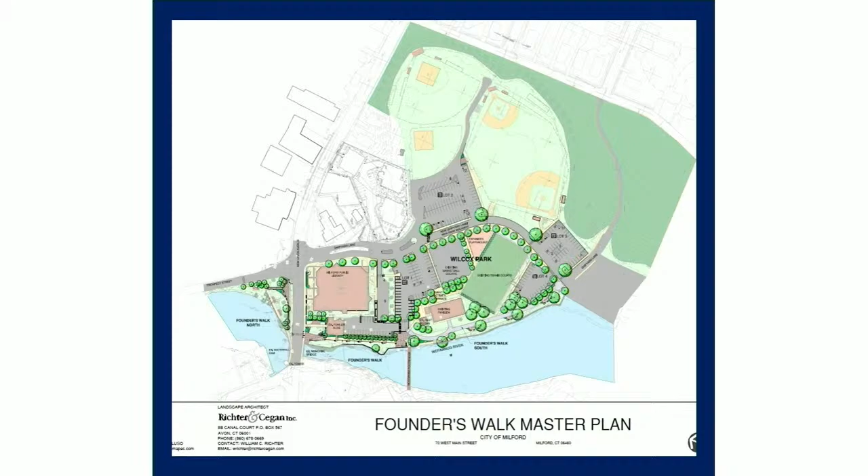And this is the picture of the project as it was voted on by the Board of Aldermen in 2022. It was a concept drawing. This project has always been about safety. According to the 2012 Plan of Conservation and Development, the design of the area is haphazard, confusing, and potentially unsafe.

From 2020 to 2025, I reached out to the police department to see if they had any accident statistics. There were only 4 reported accidents in that time, but there are a number of near misses that wouldn't be reported. In fact, we're going to go through some of the emails I've received from librarians, but the librarians say they receive regular safety complaints.

Chris Angeli, the former Milford librarian, participated in all of the Founders Walk Committee meetings up to her retirement, and we are keeping Scott apprised as well of developments in the project.

From some of the meetings or emails they've received, if people take the ramp coming across Hotchkiss Bridge, they have to walk in the road in order to join back with Founders Walk or to go to the library. Someone using a walker or chair has to go all the way past where the digital sign is just to get back onto the sidewalk.

This puts them in the path of cars, making a nearly 90-degree turn to drive towards the water, and creates a dangerous blind spot. The red arrow shows where if you were handicapped, you would have to go down and get into the road in order to go back towards the library, and there's no sidewalk or safe passage from there back to the library.

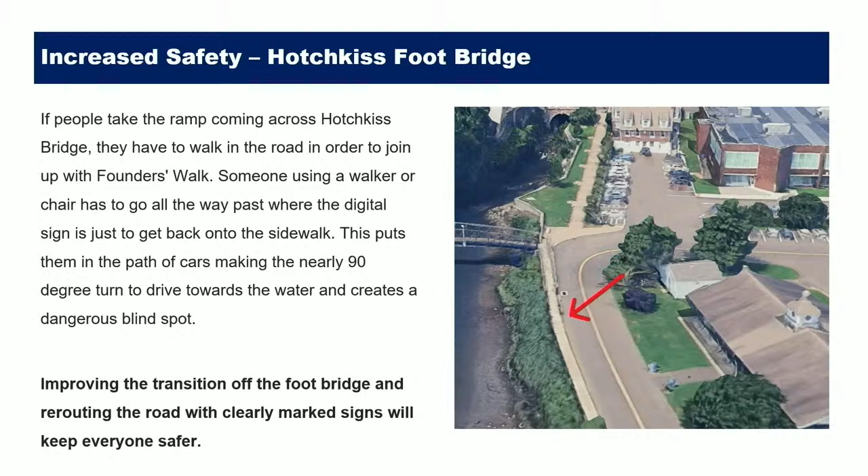So improving the transition off of the footbridge, rerouting the road will be clearly marked, and the signs will help keep everyone safer. This is actually a confusing area.

After I read this email, I myself was driving through there and realized when you're coming out of where the baseball fields are, you aren't necessarily sure who has the right of way, and that you're joining into an active road.

One of the more dangerous sections is where the road goes between the traffic island and the main parking area. There have been multiple close calls with people backing out of parking spaces into the road while cars are coming at them from two directions, down the hill and around the corner from the marina.

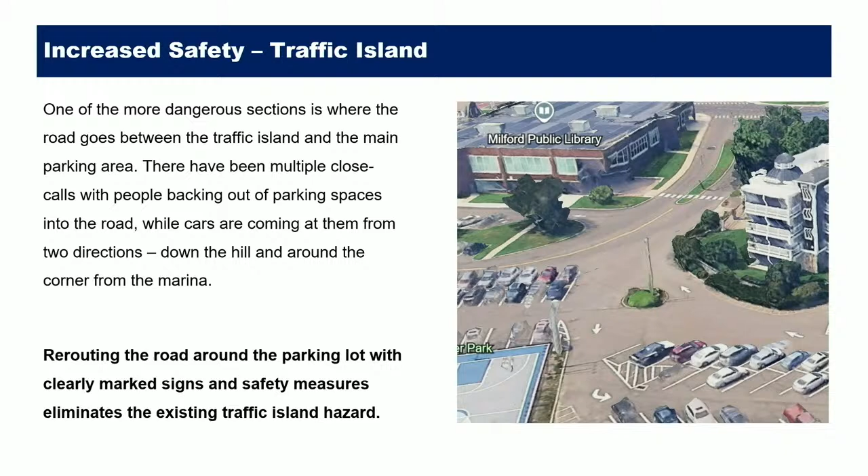So rerouting the road around the parking lot with clearly marked signs and safety measures eliminates that existing traffic island hazard. The road through the parking lot is an actual street, making it more active and dangerous, and you can see those cars back right onto the street.

There's no space between the active street and the back of those parked cars. There's not currently adequate space for cars to pull in and out of parking spaces without interfering with the road. Cars much larger than the sedan stick out into the road when parked, and cars on the road have to swerve to avoid them. So again, adequately sizing the parking lot and rerouting the road will help improve the safety of the area.

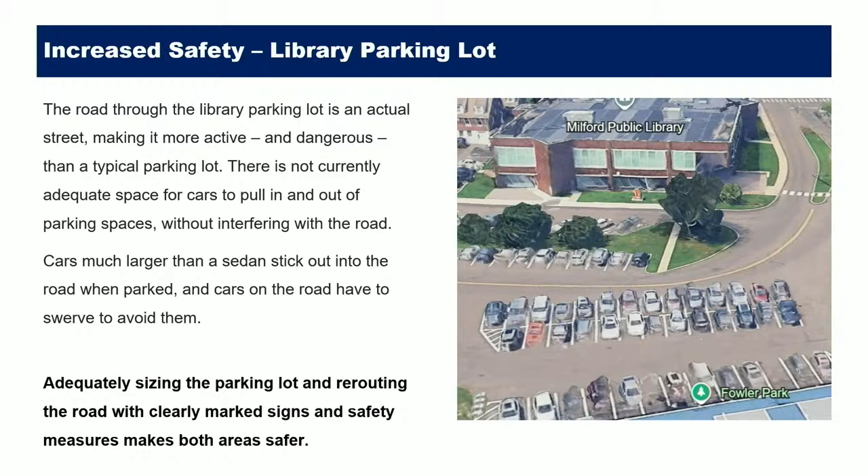Additional safety improvements include 1,700 linear feet of new sidewalks and crosswalks in the project. Actually, that number is incorrect - in the full project there are 7 crosswalks, not 6.

Currently, the sidewalk around the pavilion needs to be repaired - that will be repaired. We're also updating the traffic flow, adding a new book drop by the library, so you'll be able to drop off books from a car without having to stop and take up a parking spot. That will hopefully improve the safety.

There will be a new fire hydrant closer to the boat ramp, 240 parking spaces, and a number of traffic calming measures that we'll go over, including narrowing the road, adding smarter traffic islands. Just last night, we received approval from the Traffic Commission to add in something different.

It's not recommended to do speed bumps in the area because of the boats on trailers - it would not be good.

But Don, our project engineer, has really solved a lot of these problems. He saw in Oxford where they used a cobblestone road, which effectively serves as almost like a rumble strip. It makes noise, so it improves the safety, but it also keeps in character of the downtown.

So we're going to add 40 feet of cobblestone road in there where the road is narrowed, which will help slow the traffic even further as they go through there.

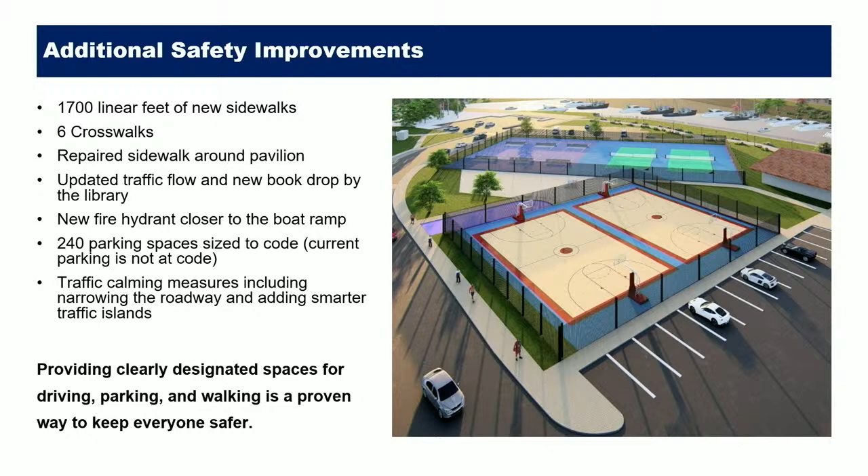Drainage improvements: the current drainage system is not adequate to manage stormwater. In fact, the reason why the project is costing so much is a lot of the drainage improvements that we realized after designing it that we'll need to do.

Significant flooding occurs regularly, making the playground and surrounding areas unsafe and unusable. So we're making significant improvements to drainage in the area.

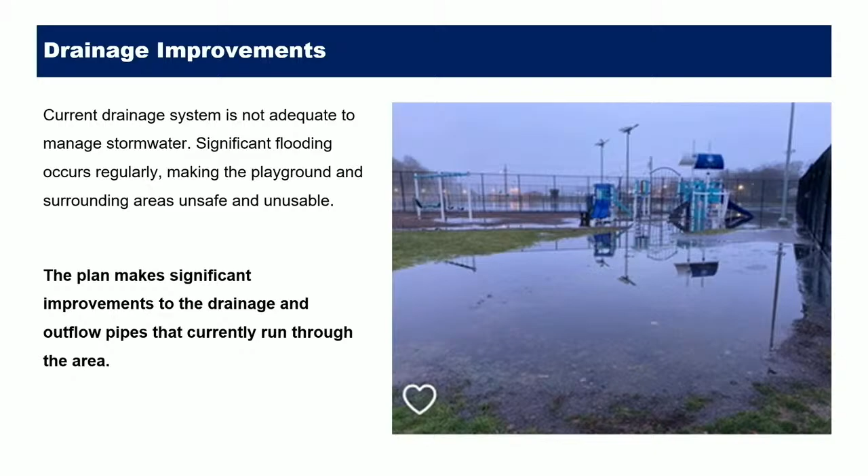And these are other pictures of after a rainstorm, of all of the flooding we see down in the area.

So the phase 2 improvements include the relocation and updating of portions of Shipyard Lane. It's not really straightening the road out as much as changing the curve. Whereas now you go this way, you'll be curving the other way, and it adds a stop sign by the boat launch ramp, so you'll have to stop and take a 90-degree turn left to exit the area.

Reconfiguration of the existing parking lots, most significantly by the Little League fields, where you have 2 different lots on different levels where the parking spaces aren't up to code. That will create just 1 parking lot with all of the spaces up to code.

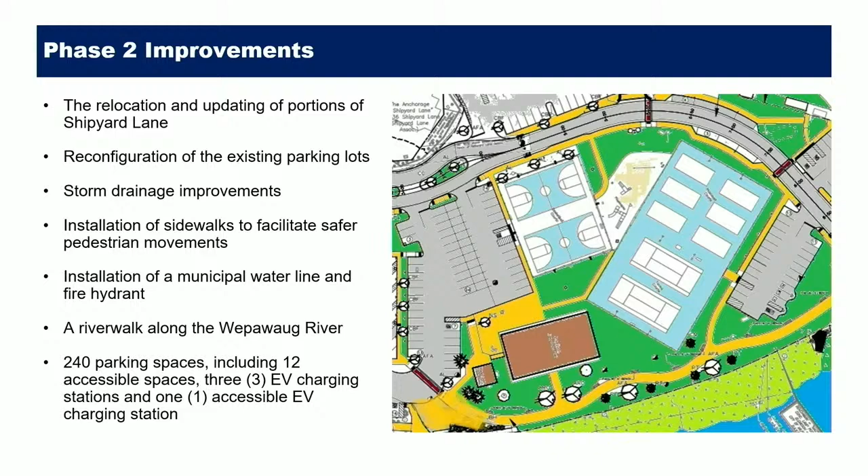Storm drainage improvements, installation of sidewalks to facilitate safer pedestrian movements, installation of a municipal water line and fire hydrant, a river walk along the Wepawaug River, 240 parking spaces including 12 accessible spaces and 3 EV charging stations, actually 4 total since one will be an accessible EV charging station.

The approvals received include the traffic authority — we went back last night for additional traffic authority — the fire marshal, and the Office of the State Traffic Authority. The letter I include here is from the Office of the State Traffic Authority stating that they don't think the improvements will change the amount of traffic in and out of the road.

The reason we had to go to them is that if there was any change, we would have had to redesign the intersection at New Haven Avenue. They did approve it without requiring those changes because it was their feeling that it won't significantly change, or change at all, the amount of traffic going down behind there.

The funding of the project right now is to be 100% state funded. We have $3.65 million total to date from the state. We do anticipate potentially more, but this amount funds what we've been discussing.

The breakdown: $355,000 for design and construction administration, $2.8 million for the construction contract, another $71,000 for parking lot overlay, and $362,000 contingency. So we didn't budget up to the full amount, but again we do anticipate potentially securing more funding if necessary.

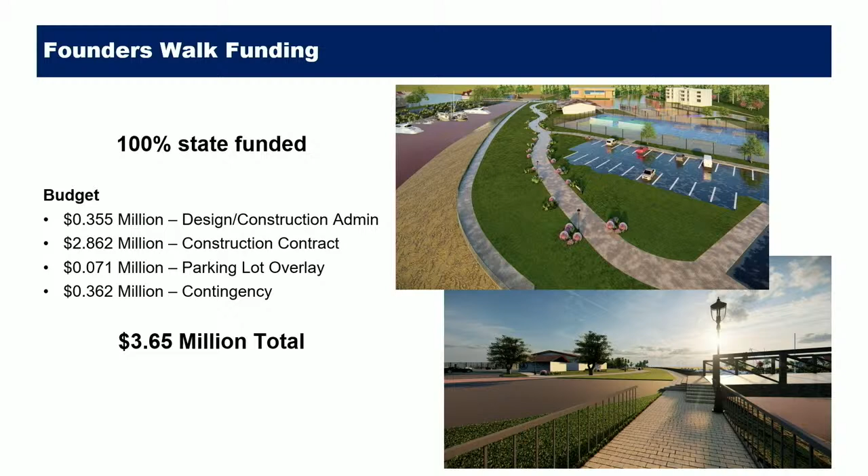Since the original design of the project, we are looking at increasing the height of the fence for more protection from foul balls from the road. We have another drawing later on showing where that will increase. We're going to fence in the area around the Milford Junior Major League field so that if families are in there, the children will be in a fenced-in area, since there was concern they may wander towards the road.

Based on a suggestion from Alder Ellen Beatty when we presented to the Board of Aldermen, she asked about bollards to protect against a car coming off the road for more protection. So we'll show you in the drawing, we are going to incorporate bollards as well, giving a safety feature to prevent cars from getting into that area while children are fenced in watching the Junior Major League game. We're also going to add additional signage to the crosswalks.

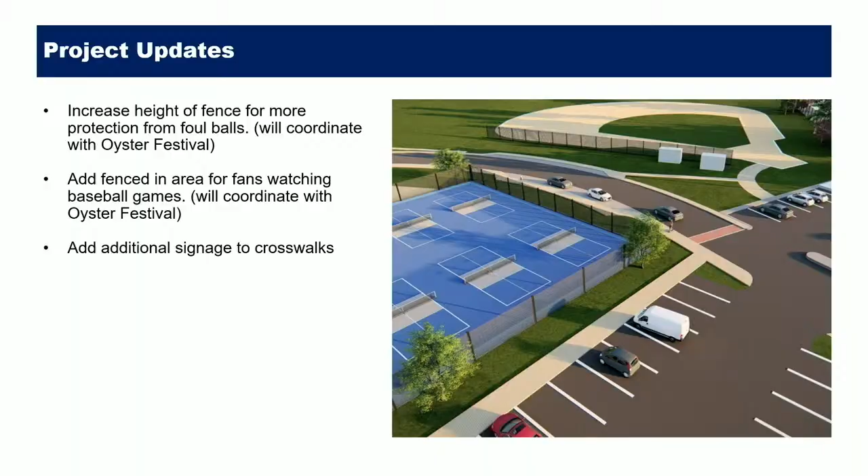So these were just some renderings. I know it's hard to envision how a project will look just from the design, so I tried to colorize some of it. These were renderings I had done using my own money to help make it easier for you to see.

We aren't going to have whatever weird vegetation that is — I asked the person who did the rendering to take it out a number of times, but you can only fight with someone so much. You will have the walkway with the lawn along the water, which will make the pavilion go out to the water. So when you're doing concerts and events there, right now if you're with children, that's an active road going right by the pavilion; now it'll be open out to the water.

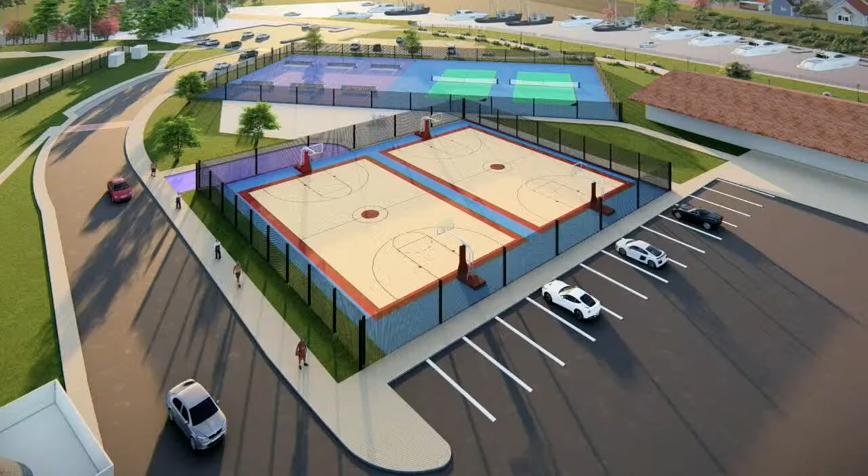We don't have benches shown here, but we're going to add a number of spots for benches. Once you get to the bottom of Founder's Walk, it'll be that walkway all along the river, all along the harbor. This is just an aerial showing how the road curves at the other space, and there will be marked crosswalks like we see throughout downtown.

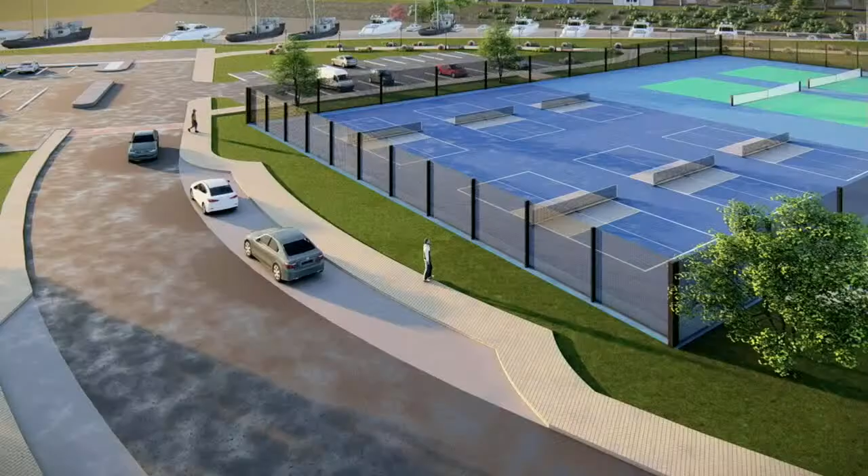So it's just some more renderings to give you an idea of how it will look.

And these are the drawings. I don't know, Don, if you want to talk to what we're here for tonight. Sure, one second. Are there any questions for Senator Maroney before we move on?

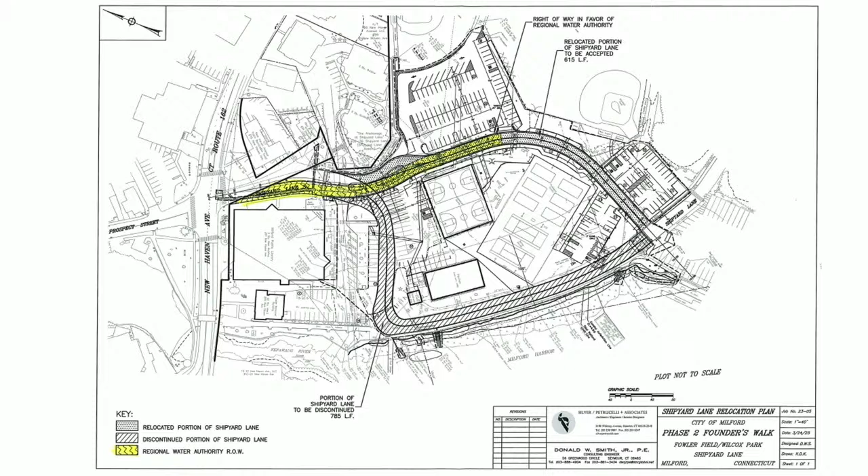I have a question. Why were you not provided most of this in advance? I emailed this presentation to the city clerk's office, or rather the city attorney's office, last week. I'm not sure why you weren't given it. They asked for it to be included and I sent it, so.

To answer your question, I didn't even know there was going to be a presentation like this. This is an 8-24 approval. And 8-24 approvals are just the board approving a lease agreement, a grant being accepted, things of that nature. That's what's going on. You have no say in the project itself, which is being shown this evening. So this is unusual for an 8-24 presentation.

So to clarify, if the planning board were to vote against this, the alders would have to have a supermajority to pass it. Otherwise, it's just a majority of each board to move forward on an 8-24.

That's all well and good, but I read statute 8-24. My understanding is that our responsibility under the statute requires our board to make a report on these proposals to the Board of Aldermen. Am I correct in surmising that our yes or no vote will function as that report for the purpose of the statute?

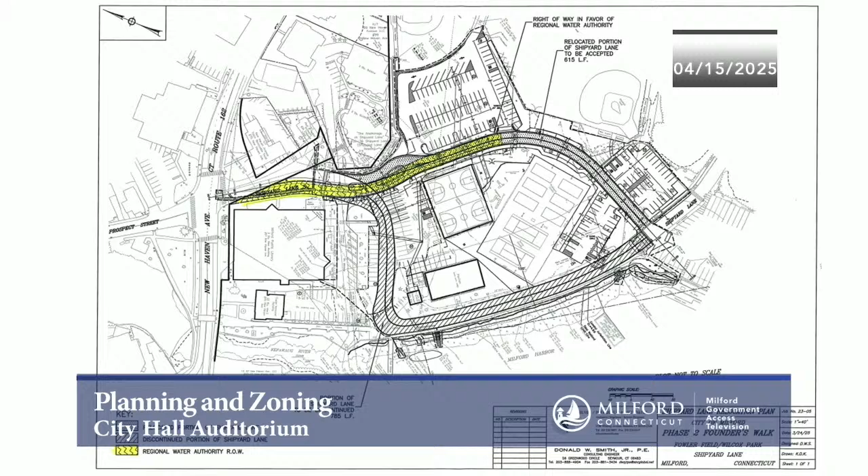The last outfall is right next to the bridge, takes the library area as well as flow from the pond, and that outfall is going to remain, but the city engineer asked that we remove some of the accumulated sediment around that outfall. It's about halfway up on the invert, so at low tide, we'll remove all of that sediment from that outfall and open that up, and then put a backflow preventer in there as well.

So you mentioned the baseball fields. I've heard complaints about the fields.

Is this going to improve the drainage in the fields as well? We're not touching the drainage in the field, but we're picking it up right at the edge of the field going to the outlet. So we're upsizing the outlet, which should make the fields better. Right, thank you.

Any further questions? Good evening. Wondering if you can address the existing width of the roadway and contrast that with what's being proposed, because what's being proposed has different widths along the proposed Shipyard Lane. Thank you. So the existing Shipyard Lane, where it is along the river, I believe is about a 26-foot wide roadway.

The proposed section of Shipyard Lane, where it's a single road, there's a portion where it's split coming in and coming out, but the majority where it's a single road is 24-foot wide curb to curb. Then there's a 40-foot long section before we get to the corner, before the crosswalk, where those curb lines come in from 24 feet. It necks down to 22 feet for a 40-foot long section. The intention of that, and the intention of the 24-foot wide road, is to make it feel more tight.

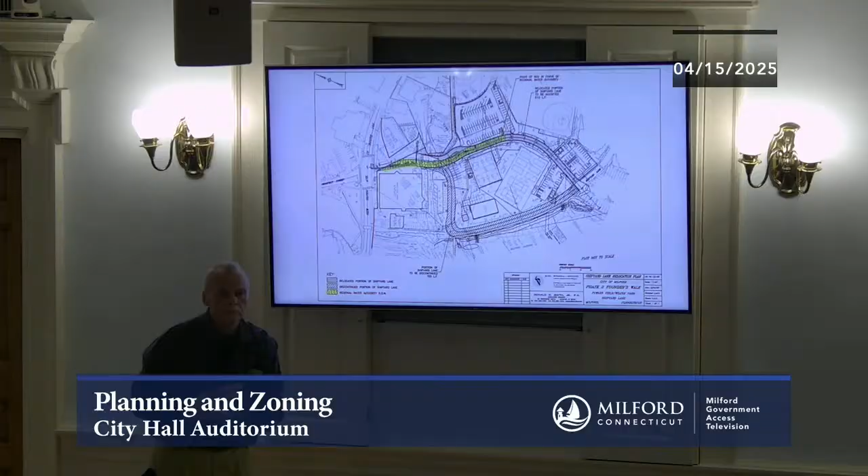Good evening. What is the proposed speed limit in this area? Pardon us? The proposed speed limit in this area? 20 miles an hour. That's the municipal standard for this classification of road.

We asked about dropping the speed limit, and we were told no, it couldn't be lowered. Who said it couldn't be lowered? Traffic Authority, Sergeant Craniac.

And on that narrow portion, the two narrower portions, what would the traffic look like if there was a vehicle with a boat trailer going north-south one way and the other way passing? What'll that do to, say, a 30-foot boat on the back of an SUV, one going one way and one going the other way? They should not go out of their lanes. There will be enough room for them to stay in their lane. There's not a tight enough radius here on the center line, so they're going to go right around the corner and stay in their lane. Thank you.

Any further questions, Mark? Hi. I've been to a lot of the public hearings and even before the public hearings with the aldermen, to some of the planning meetings. A lot of the concern, obviously, is speed limits don't slow people down, unfortunately. People are concerned with the speed coming straight from New Haven Avenue, actually picking up speed coming through that area. I don't think a lot of people were against the actual project, but they just wanted some maybe countermeasures or even other options to slow the speed down.

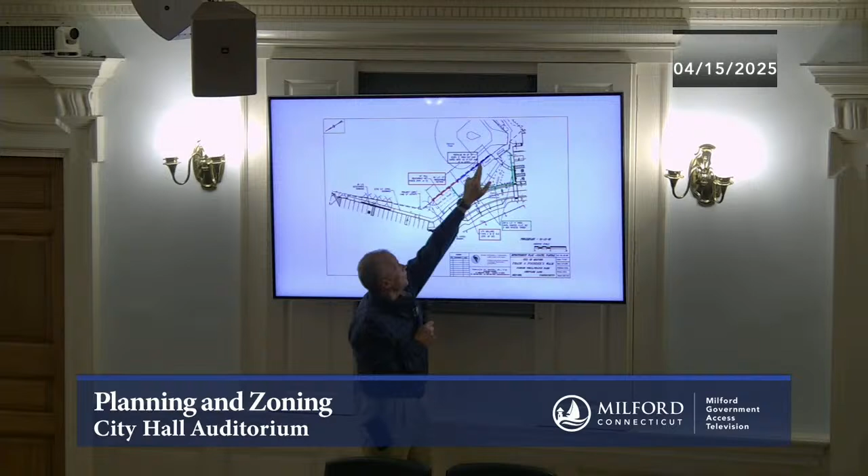I think you're talking about this grass area between the road. Correct. Okay, here's the ball field, here's the corner of the road, here's the first crosswalk. Our proposal is to increase the height of the fence once you get past the dugout. Right now the 15-foot tall fence stops at the beginning of the dugout, so we're going to raise the fence from the dugout to the back of the shed to 15 feet high with chain link. We're also looking at a removable section of netting about 60 feet long, going toward the existing gates onto the field—removable because of the Oysterfest stage location. This green represents a 4-foot high chain link fence around that grass area, and these pink dots represent a line of bollards behind that fence to protect against any vehicles coming.

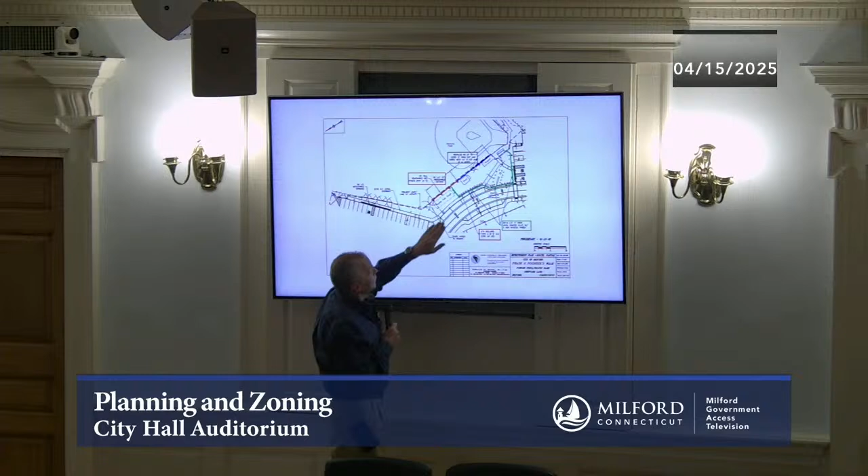The net is proposed, but that still needs to be worked out between the Junior Major League and the Oyster Festival to determine what makes sense in that area, so it's not final.

Any further questions at this point?

Seeing none, I'd hear a motion. I would make a motion that we open this for public comment in a public hearing. We have a motion, do we have a second? I'll second. We have a motion and a second. Any discussion on the motion?

Mr. Chair, this is not a matter for public comment. That time is past. We're not here to discuss the merits of this proposal. That's been done in another legislative body. That's, again, your opinion, and so I guess you'll be voting against the motion. But we do have a motion, we do have a second. We'll discuss it, and then we'll have a vote.

So if there's no further discussion. I would just point out that this board has been highly receptive to public comment in the past, including opening up a coastal site plan to public comment. I think if we were to not do this, after having done something like that, it would be fairly inconsistent with how this board has historically operated.

No, I understand, and that's why it's open for discussion, and then we'll have a vote. And then each member will weigh it in their own way. Any further discussion on the motion?

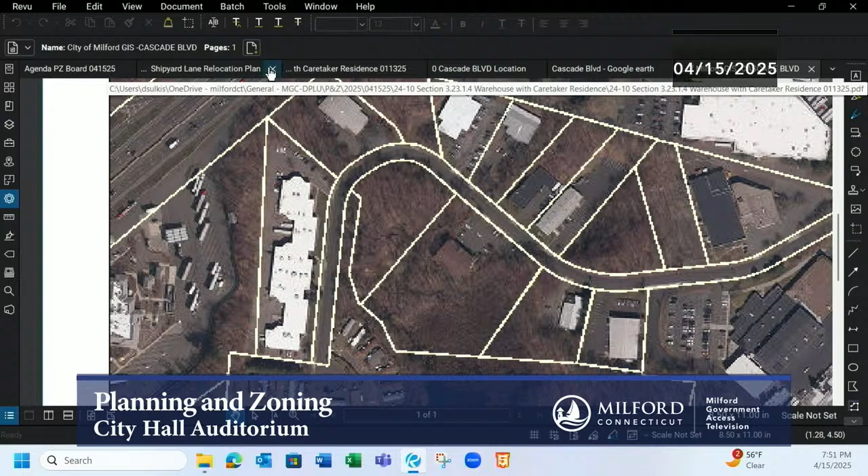Located on that site was the Ryder Trailer Park. Back in, I think it was 1993, Ceruzzi Properties bought that property, and part of the deal was that he was going to buy another parcel of land in Milford to relocate the Ryder Trailer Park to another site.

This property to the south of the subject property, basically the rest of the land in the CBDD zone, is shown on the graphic David has on the screen now. Our property is at the top, right at the curve where Cascade Boulevard comes down off of Marsh Hill Road and Oxford Road. It curves right at our site and then continues into Ryder Woods, which is the parcel where the mobile home park was relocated, that large area just to the south of our site.

So the Cascade Boulevard Design District was designed to move the Ryder Trailer Park there. It has a provision that the site has to be at least 10 acres in size, and there are really only two uses noted as special uses — there are no outright permitted uses in the zone. The special uses currently are single-family detached dwellings, a boarding house, or dwellings placed on 3,000 square foot parcels, which was designed specifically to address the relocation of the mobile homes.

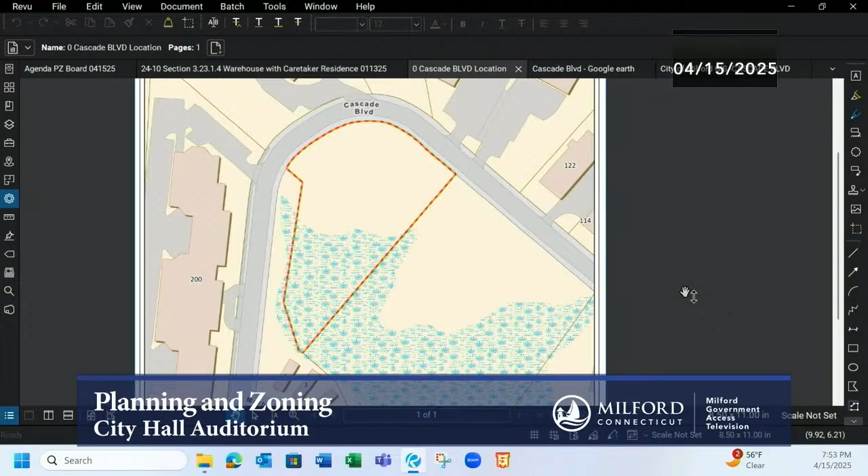The application before you tonight is to add a third special use that will allow a 7,500 square foot gross area warehouse facility.

The proposal, if this regulation change is granted, we'll be coming back to you next month with an application for a special permit, and Ron Wasmer will go through the elements of the site plan. The proposal is to have a 7,000 square foot warehouse facility with a caretaker residence. My client wanted to keep the residential component, which this zone currently allows for, so it's a hybrid. It will have a residence on it and the warehouse facility.

I submit to you that, with the close proximity to the industrial area across the street, the entire stretch of Cascade is industrial. This would be a permitted use in an industrial zone. I'd ask that you allow the regulation to be amended so that we can add this one additional use, and I stress that it's specific to Mark's proposal that we'll be coming to you with.

Other than that, the plans have been submitted. David has the full site plan that we submitted with the application for the special permit already. The plans were reviewed by the city engineer already, and we appeared before the Inland Wetlands Agency, who issued an approval on this project. So this is the last step in the whole process.

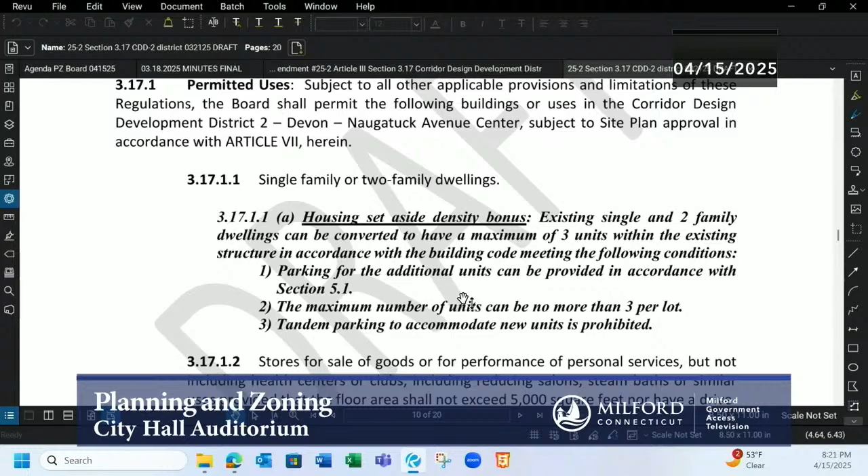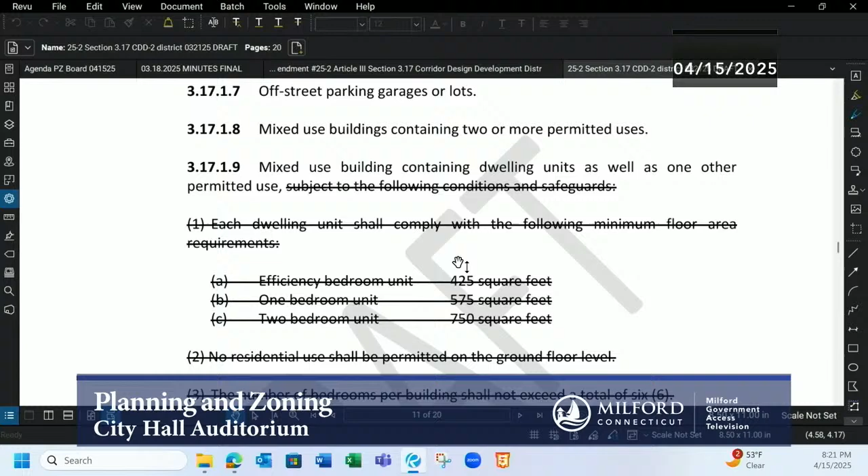The next change was under 3.17.1.9, striking out some existing language. I can read you this. It's the language that was struck, or do you want just the new language? I think we understand that. Okay, so the new language, 3.17.1.10, mixed use and/or multifamily residential buildings, meeting the following conditions.

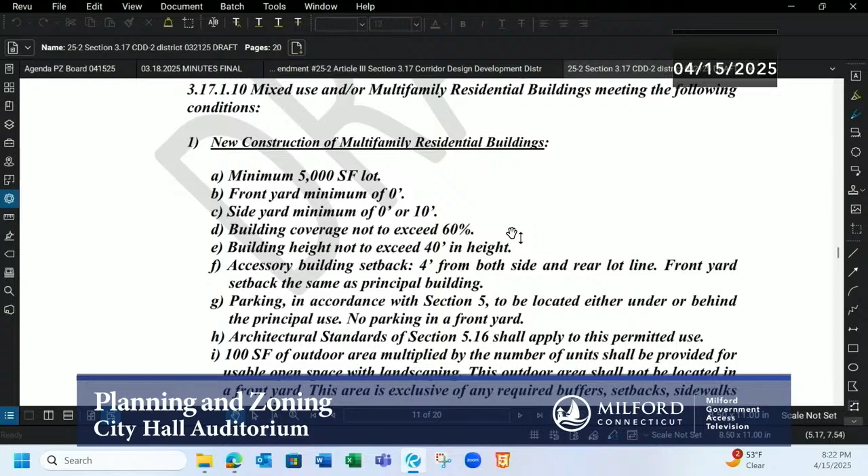For new construction of multifamily residential buildings: a minimum 5,000 square foot lot, front yard minimum of 0 feet, side yard minimum of 0 or 10 feet, building coverage not to exceed 60%, building height not to exceed 40 feet in height, accessory building setback 4 feet from both side and rear lot lines, front yard setback the same as principal building. G, parking in accordance with section 5, to be located either under or behind the principal use, no parking in the front yard.

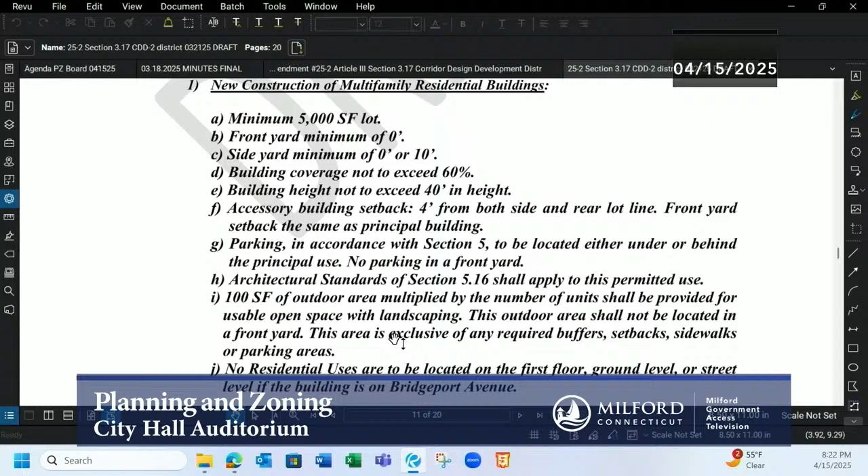H, architectural standards, section 5.16 shall apply to the permitted use. I, 100 square feet of outdoor area multiplied by the number of units shall be provided for usable open space with landscaping. This outdoor area shall not be located in the front yard. This area is exclusive of any required buffers, setbacks, sidewalks, or parking areas. J, no residential uses are to be located on the first floor, ground level, or street level if the building is on Bridgeport Avenue.

I, housing set-aside density bonus for new construction of mixed-use and/or multifamily residential. A development that provides affordable housing, as defined by Connecticut General Statutes 8-30G, in the amount of a minimum of 15% of the proposed units at 60% and 80% of the area median income in a 50-50 split, shall be given additional incentives: 1, maximum building height of 50 feet; 2, maximum building coverage of 80%. All other standards of subsection 1 remain in effect.

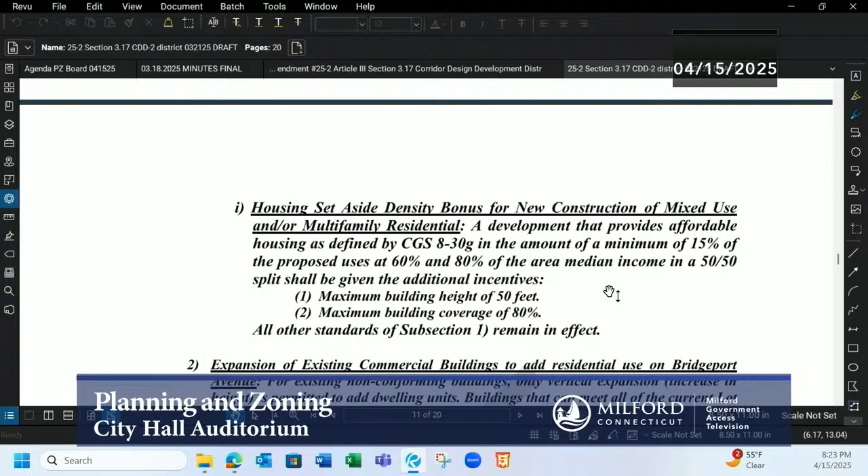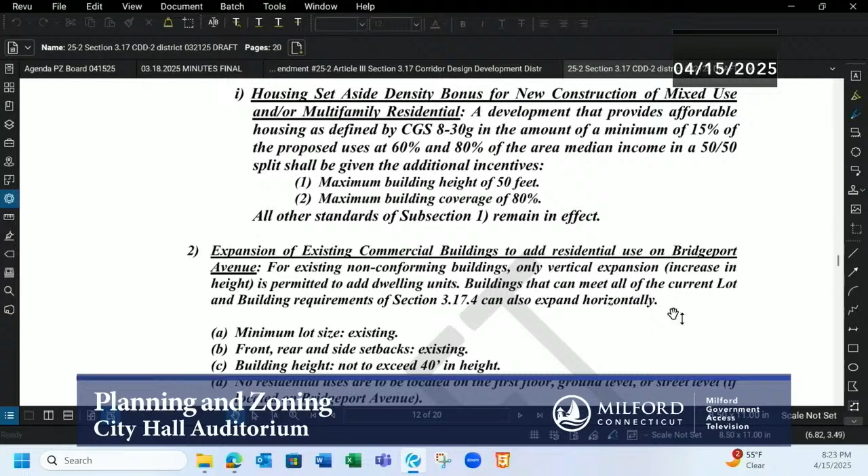Subsection 2, expansion of existing commercial buildings to add residential use on Bridgeport Avenue. For existing non-conforming buildings, only vertical expansion and an increase in height is permitted to add dwelling units. Buildings that can meet all of the current lot and building requirements of section 3.17.4 can also expand horizontally.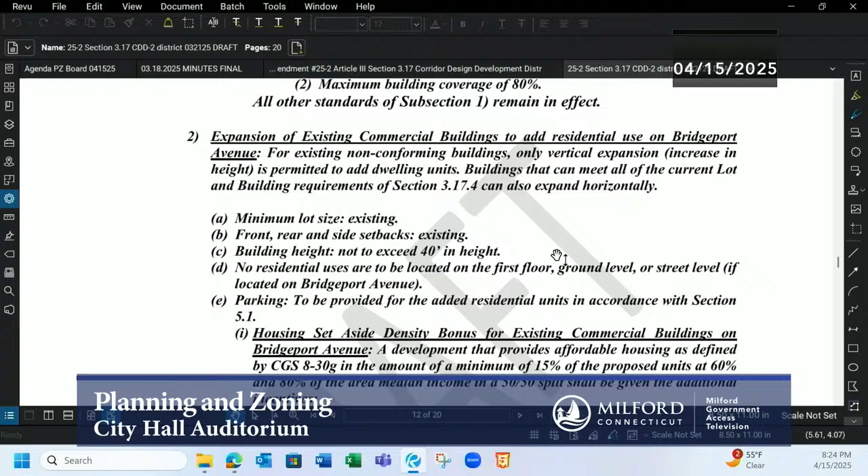A, minimum lot size, existing. B, front, rear, and side setbacks, existing. C, building height, not to exceed 40 feet in height. D, no residential uses are to be located on the first floor, ground level, or street level if located on Bridgeport Avenue. E, parking to be provided for the added residential units in accordance with section 5.1.

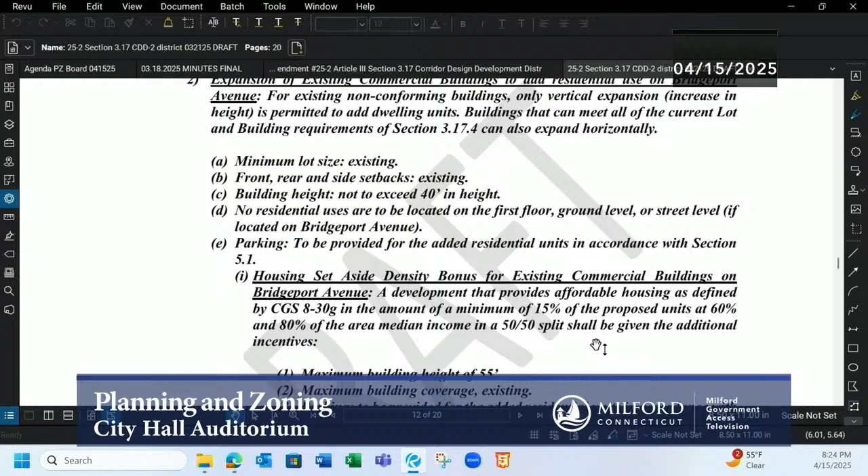I, the housing set-aside density bonus for existing commercial buildings on Bridgeport Avenue. A development that provides affordable housing as defined by Connecticut General Statutes 8-30G in the amount of a minimum of 15% of the proposed units at 60 and 80% of the area median income in a 50-50 split shall be given the additional incentives.

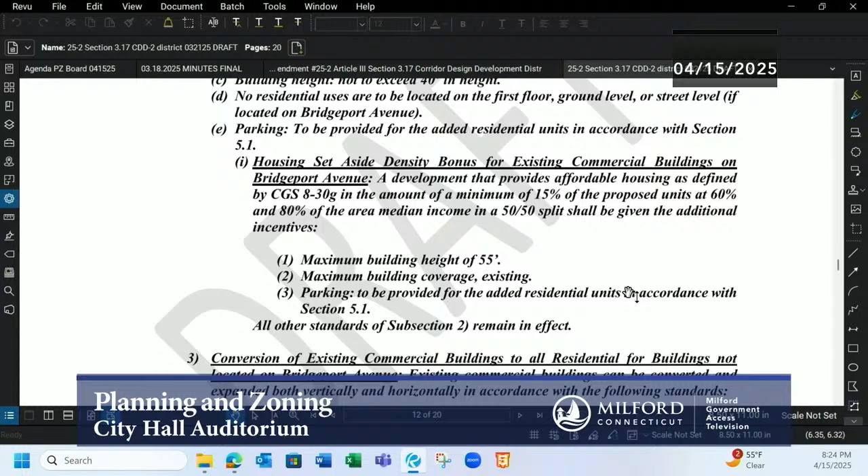1, maximum building height of 55 feet. 2, maximum building coverage existing. 3, parking to be provided for additional residential units in accordance with Section 5.1. All other standards of subsection 2 remain in effect. 3, conversion of existing commercial buildings to all residential for buildings not located on Bridgeport Avenue.

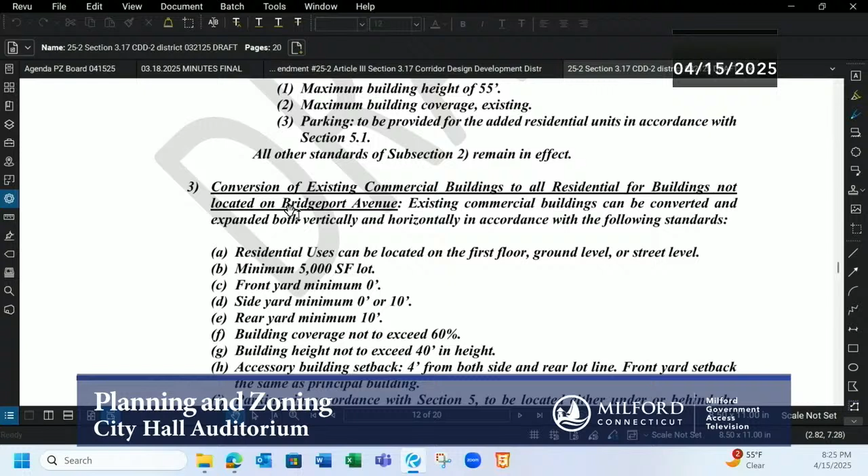Existing commercial buildings can be converted and expanded both vertically and horizontally in accordance with the following standards. A, residential uses can be located on the first floor, ground level, or street level. B, minimum 5,000 square foot lot. C, front yard minimum 0 feet. D, side yard minimum 0 or 10 feet.

E, rear yard minimum 10 feet. F, building coverage not to exceed 60%. G, building height not to exceed 40 feet in height. H, accessory building setback 4 feet from both side and rear lot line. Front yard setback the same as a principal building.

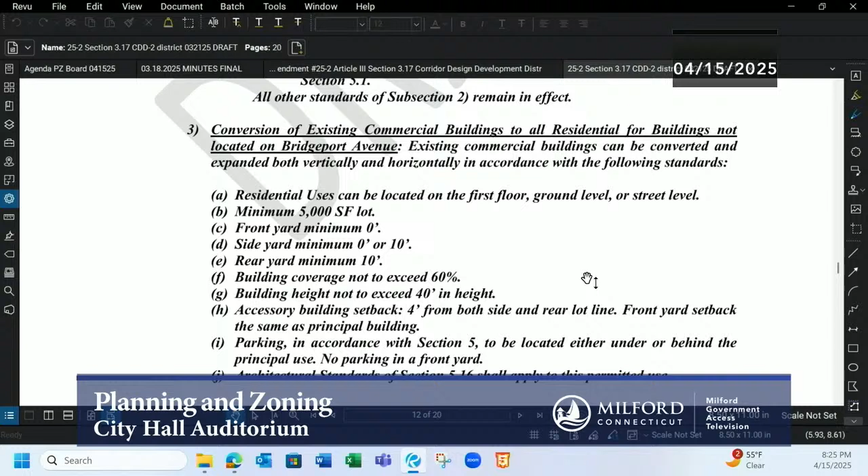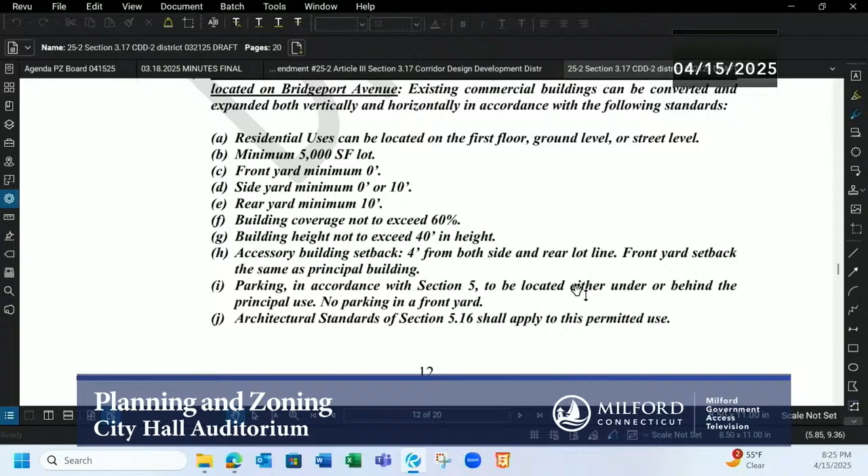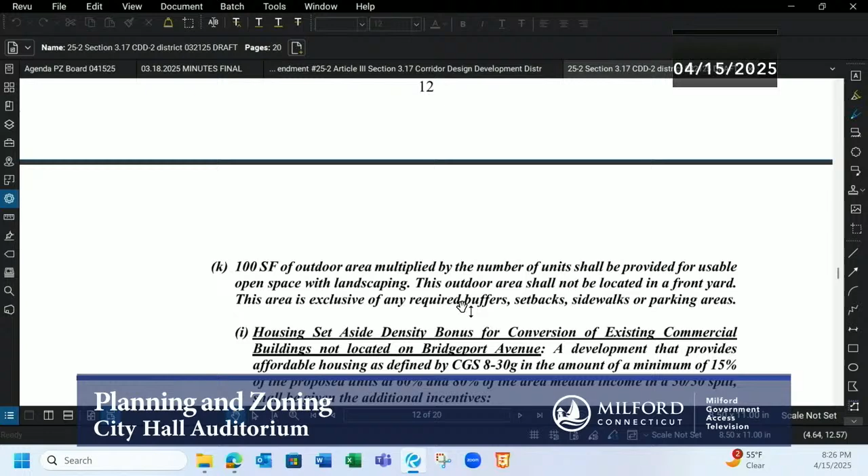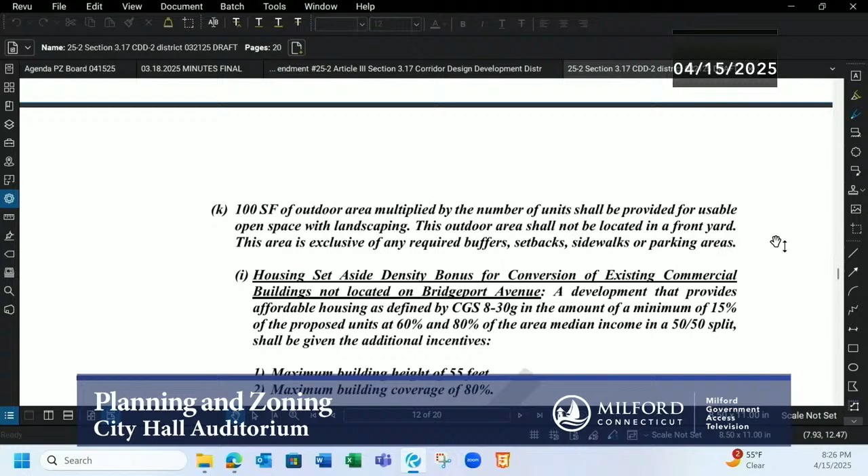I, parking in accordance with Section 5 to be located either under or behind the principal use. No parking in the front yard. J, architectural standards of Section 5.16 shall apply to this permitted use. K, 100 square feet of outdoor area multiplied by the number of units shall be provided for usable open space with landscaping. This outdoor area shall not be located in a front yard. This area is exclusive of any required buffers, setbacks, sidewalks, or parking areas.

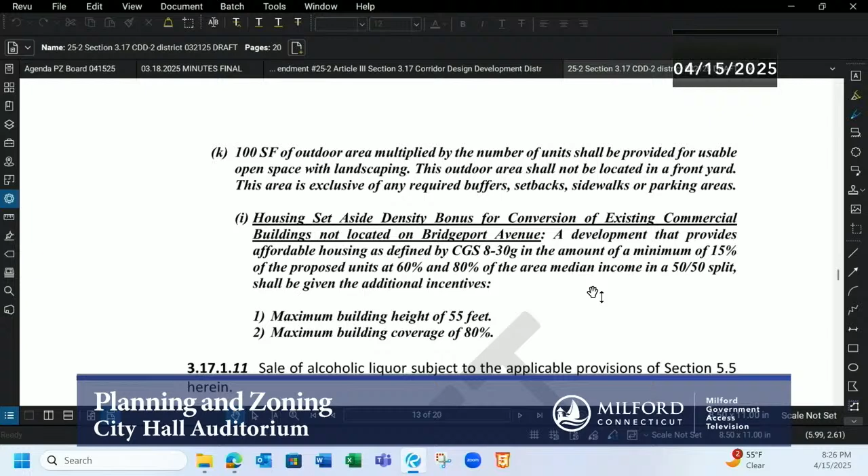I, housing set aside density bonus for conversion of existing commercial buildings not located on Bridgeport Avenue. A development that provides affordable housing as defined by Connecticut General Statutes 8-30G in the amount of a minimum of 15% of the proposed units at 60 and 80% of the area median income in a 50-50 split shall be given the additional incentives. 1, maximum building height of 55 feet. 2, maximum building coverage of 80%.

Thank you. There's more if you want, but. Oh, okay, I thought, obviously. That's the main changes. We tweaked a few other little things, but that's the main housing generation portion. So that's what we've been working on for the last year, and this is what we've come up with. So that was circulated, and we'll all get another bite at the apple at our next meeting.